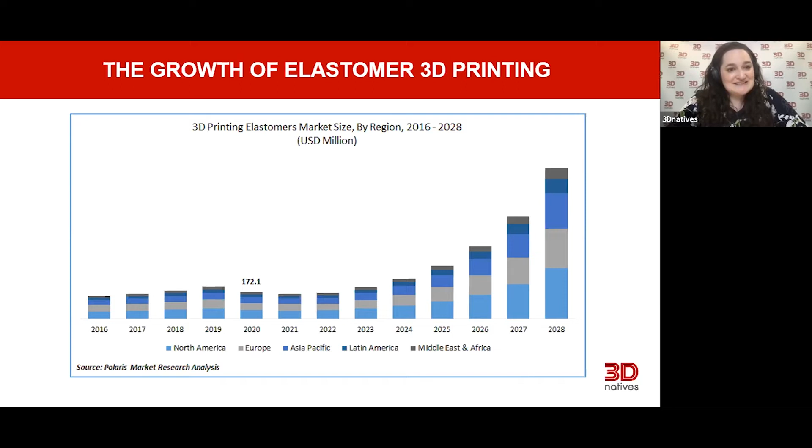So just quickly before I need to move on, the role of AM in maritime. Admittedly, maritime has been a little slower to adopt AM than some of the other sectors using the technology. However, that has been rapidly changing even over the past year.

Many in the industry are starting to see the benefits of using 3D printing for various applications, for example spare parts. One example, the US Navy is currently researching whether 3D printing could be used to create spare parts on the sea for their ships, meaning they could carry lighter loads and have more availability for spare parts in case of any emergencies.

AM is particularly interesting for the sector thanks to its flexibility, ability to create lighter, more optimized parts, and of course its cost effectiveness. For those reasons, we are seeing increasing R&D in the field.

Notably for today's webinar, companies like Lino and Hullworks are increasing the use of 3D printing in Greece, in the maritime sector, which is a major hub for maritime, as you can probably guess. And with that, I will leave you in the capable hands of our panelists.

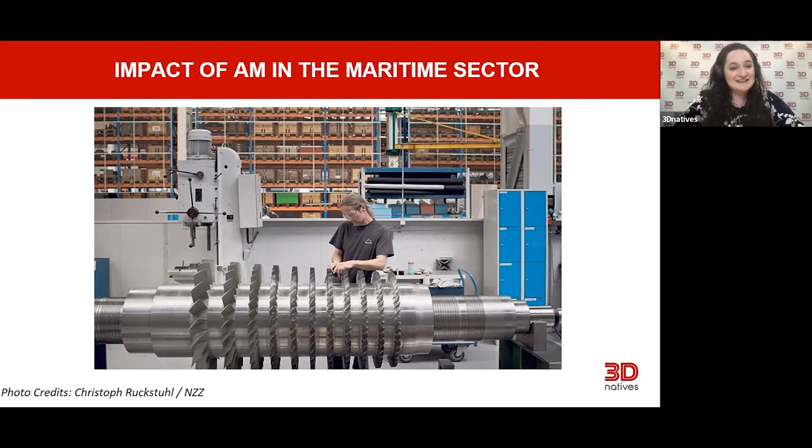An elastomer is a polymer with a property of elasticity, generally having a notably low Young's modulus and high yield strain compared with other materials.

Elastomers are best described as rubbery materials. Rubber originally meant natural rubber. Later on, elastomer became the word used to talk about synthetic rubber. Most rubbery materials are now considered a type of elastomeric material.

Allow me here to emphasize that the production of elastomer with traditional methods is a time-consuming and expensive process. So today we'll explore how 3D printing can offer a unique production solution.

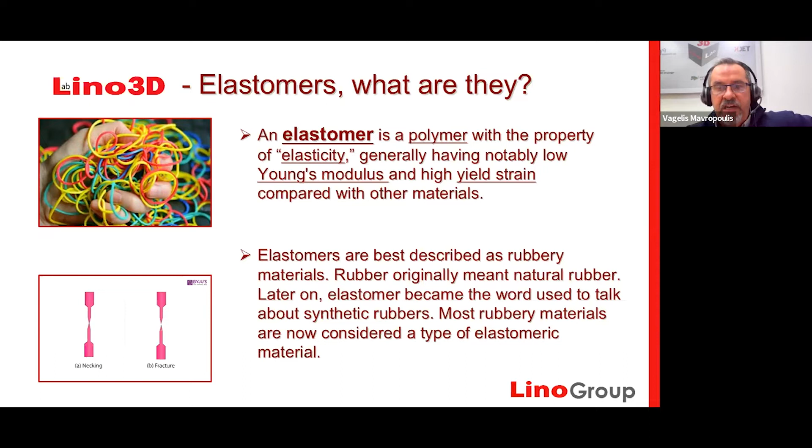So we have some elastomer examples. Let's focus on the types of elastomers: TPA, TPC, TPU, TPO, TPV, or TPS, and more.

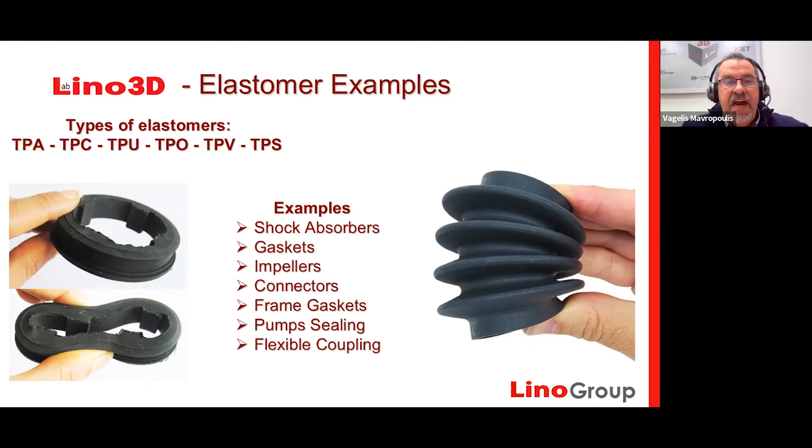Some examples familiar to all of us: shock absorbers, gaskets, impellers, connectors, frame gaskets, pump seals, flexible couplings, even the plastic carpets in our house use elastomer material.

Let's focus on the unique properties of elastomer. Which are the unique properties? First of all, elasticity or flexibility. Flexibility gives elastomers a high tensile strength and also elongation at break.

Plus, we have tear resistance or abrasion resistance. And of course, oil or in some cases, chemical resistance, depending on the chemical.

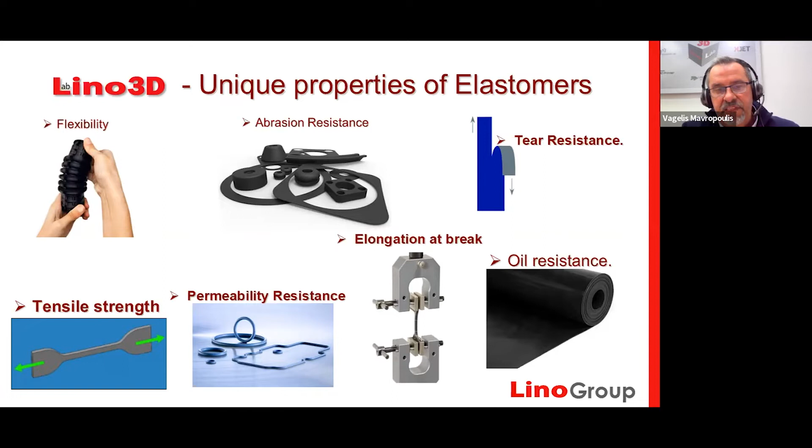So all the above unique properties of elastomeric materials come to be exploited with the use of 3D printing. What is that? First of all, it's volume production without tooling, replacing injection molding. This is the most important today.

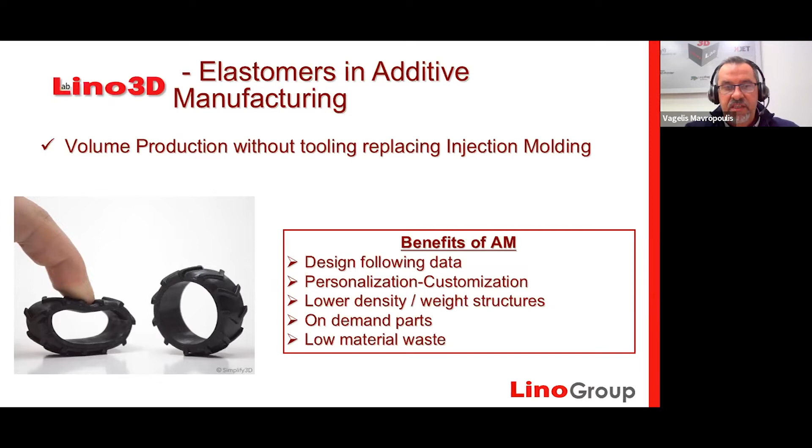Of course, probably all of us know that with 3D printing we have personalization and customization, lower density of the part because we can design it to have a lower density. The weight of the structure is also a matter of design, so we can design it in a way to be lighter, with on-demand parts. And the most important for service bureau services is the low material waste.

For those who are not so familiar with 3D printing technology, allow me to give a brief description. The oldest one is FDM, fused deposition modeling. The filament is passed through the hot nozzle and deposited in layers, creating the desired object.

The other technology, which is actually new, is called PAM, pellet additive manufacturing. In that case, the pellets or flakes are extruded through the hot nozzle again and deposited in layers, creating the desired object.

The other technology, which is also old right now, is SLA, or stereolithography. Here we have a laser beam that cures photopolymer resin point to point until creating the desired object.

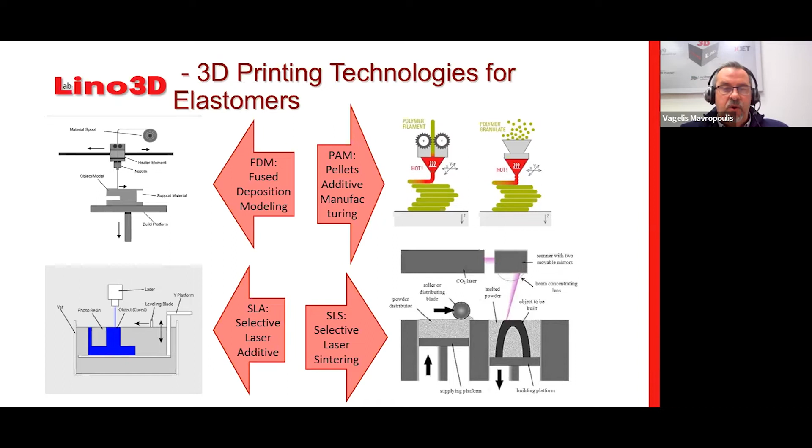So, 3D printing technologies for elastomer, and DLP. Allow me once again to focus on what DLP technology is. DLP technology is the digital micro mirror device, or DMD, which is the core of Texas Instruments' DLP projection technology.

The DLP chip contains several hundred thousand micro mirrors. The micro mirrors can be individually rotated into an on or off position. In the on mode, light from the LED projector is reflected by the lens, causing the photosensitive material to become solidified.

Regarding the bottom-up method, this printing technology has usually been adapted to small printers for prototyping or small production of functional parts, depending on the printer or the resin.

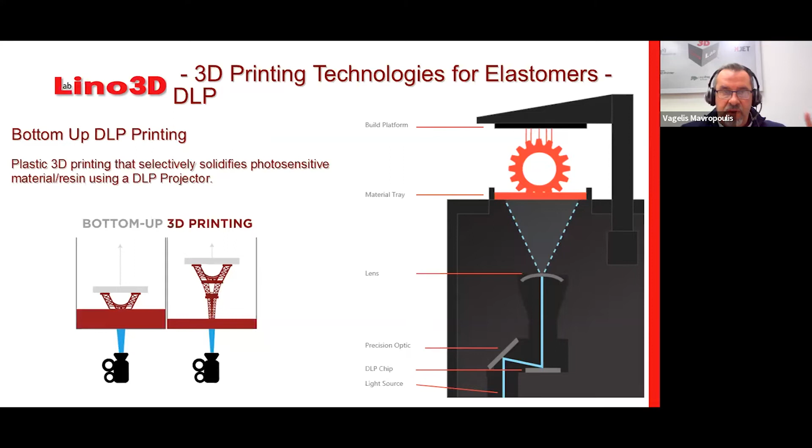Top-down printing usually refers to large capacity printers that use DLP technology to take advantage of its benefits. They still use a photosensitive material, and we can see in the next slides more deeply what top-down DLP printing offers.

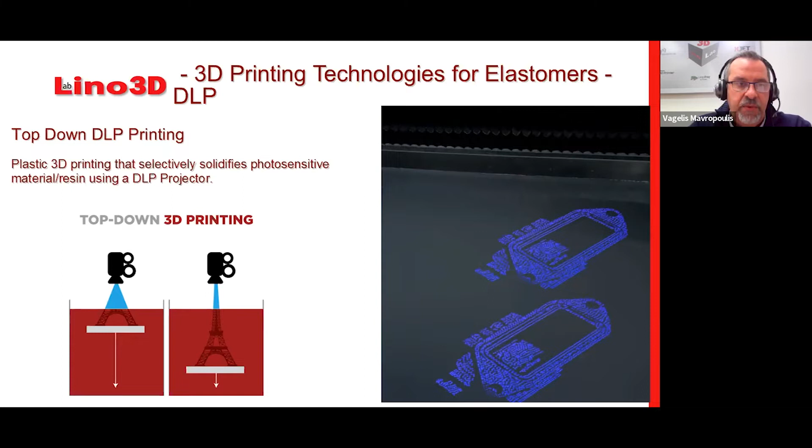Let's discuss a bit about ETEC, or EnvisionTEC. ETEC was the first company in the world to integrate DLP technology in 3D printing, over the last 15 years.

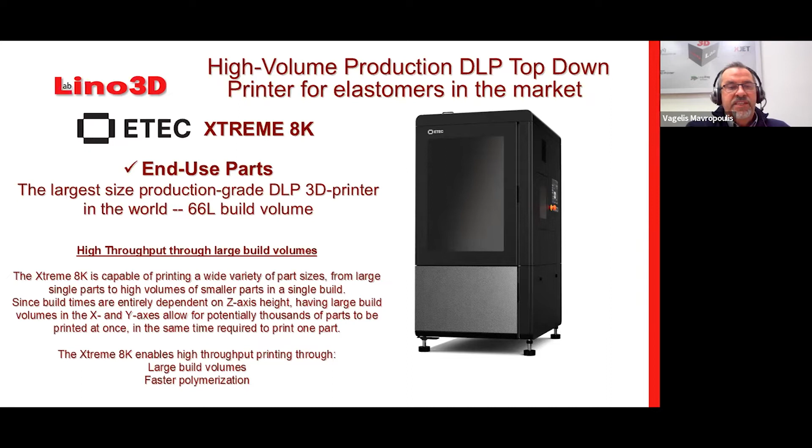Based on this experience and know-how, they built the world's first production 3D printer that can handle elastomeric material. The Xtreme 8K printer can produce end-use and functional parts of different sizes and shapes, taking advantage of the benefits that only 3D printing can offer. The goal of this machine is large scale production 3D printing with a volume of 66 liters of resin.

The purpose of the impeller is to cool the boat engine by transporting seawater through the engine. That means this part can operate in a very, very harsh environment.

Right now, if someone wants to produce all these parts, they should invest a lot of money to produce a mold, and wait months to produce the mold before starting to produce parts one by one. With 3D printing, we can print on demand, just one part.

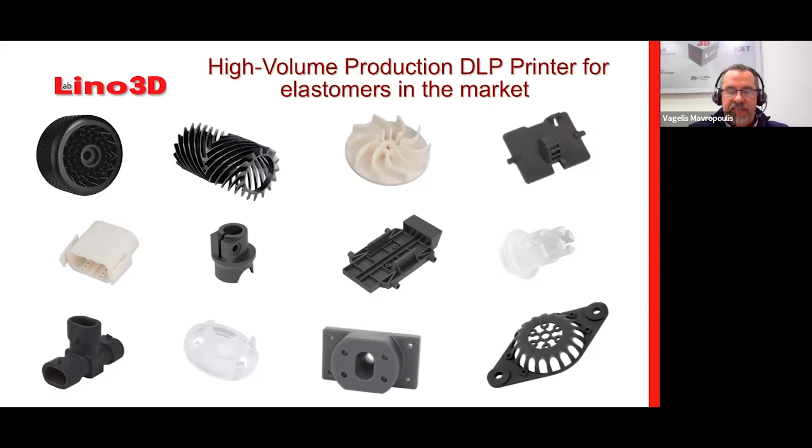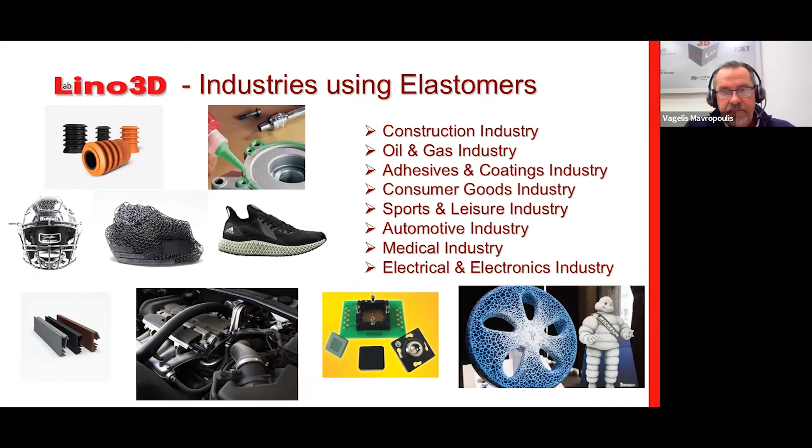So, elastomer industries—industries using elastomer are more or less everywhere: construction, oil and gas, coating, consumer goods, sports, automobile, medical, electrical. If we look around our house or office, we can see many elastic or elastomer materials. In this presentation, we will focus on the marine industry.

Let's discuss first a bit about our area in Greece. In Greece we have more than 5,000 islands, and the maritime market is a large industry, with many small and large shipyards.

Elastomer can take advantage of benefits like rapid manufacturing, customization, design freedom, materials enduring aging, abrasion and tear resistance, and on-demand production, adapting to the marine industry.

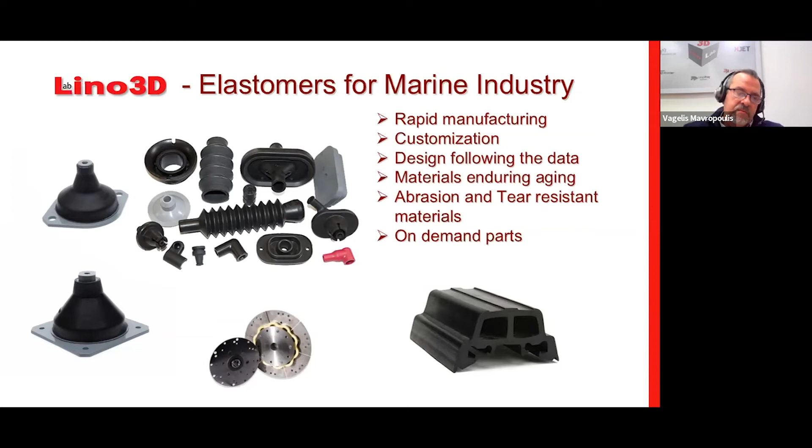That's why we decided to work with one of the best shipyards in construction of luxury inflatable boats, Hull Works. We asked them to suggest some of the parts made of elastic material that they believe would help their production. They chose to print not a luxury or fancy accessory that Hull Works usually puts on their boats, but parts that are constantly in a harsh environment and in contact with salt water. Some of these will be presented by Hull Works executive, my friend Lambros, in the next slide.

Hello and welcome from my side too. Thank you, Vangelis, for the nice presentation so far. Let me tell you very quickly that we build our boats out of GRP, glass reinforced polyester, if you haven't come across it. So GRP is the core material of the boat. However, once the hull and deck are built and glued together, we start installing other parts, whether that's the console or smaller parts like handles.

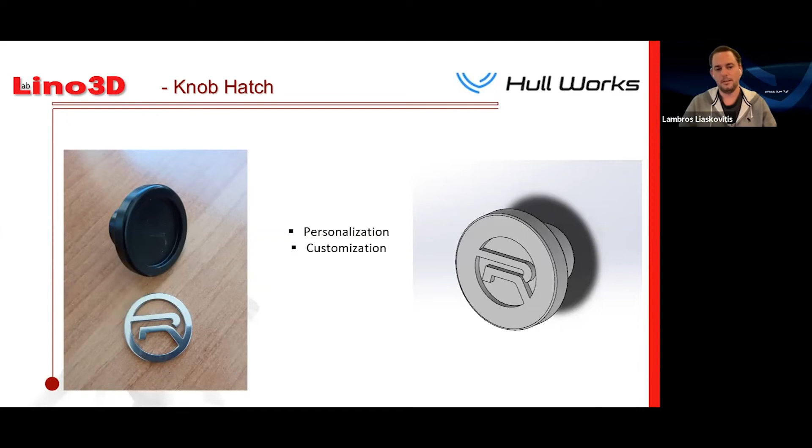Let's move on. If there are any questions, we can come back to that. So for the knob, we used a harder material with a Shore 90. Characteristics of what we can see also over here. Still, we use the same machine, Xtreme 8K.

If you want to swap material in this machine, it is easy, and we are able to choose a different material depending on the request of our customer.

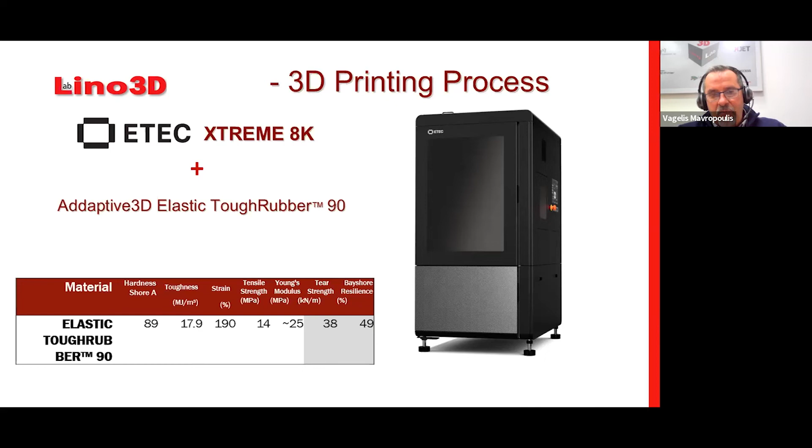Yep, next slide, Maria. So thank you very much. Yes, thank you. Well, please. No, please, it's you, Madeline. I was just going to say thank you to both of you for the panel.

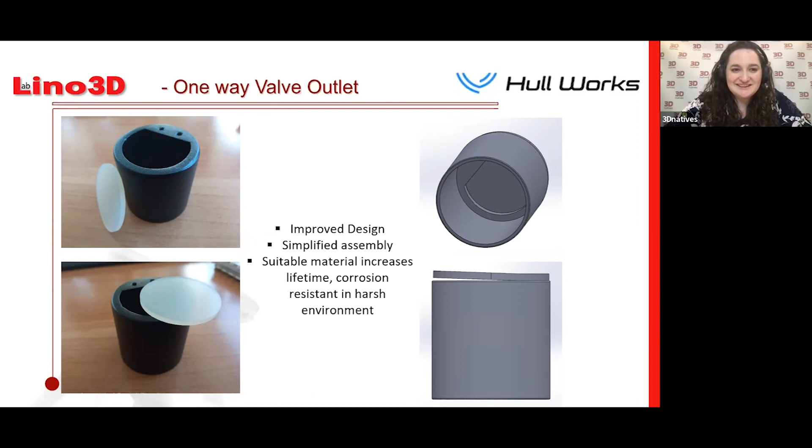Regarding the cost, did they mention the cost or not? They asked about the cost, though I'm not sure which part they were referring to. Me also - I'll say about cost, DLP I thought is much cheaper due to the production time compared to the SLS technology. DLP is 10 times faster than, at least, SLS technology. Okay, yeah, it's a significant benefit of using the technology, I'd say.

Okay, well, thank you. And then moving on, the next question, which just suddenly got more upvotes, is: how does the AM deck drain compare to the steel deck drain in regards to manufacturing cost, production time, and possible reduction of parts?

Again, production cost I would say should be roughly half. And production time, I think it's way faster. I don't have exact times to put, but it's so much faster. Vagelis, what do you think? And assembly also. Yeah, I mean, assembly is also faster. But they don't have exact times - I don't know if one thing takes one hour, then how long the printer takes to print it, I don't know. But yeah, it's definitely faster.

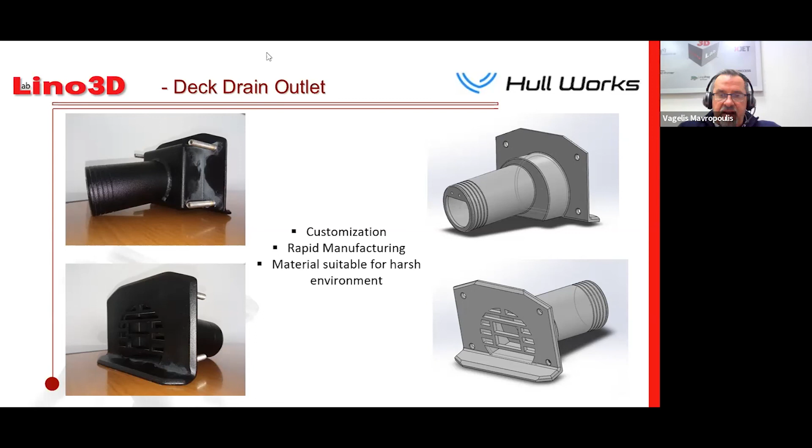If we focus on the mold industry - not only elastomer material, but 3D printing generally - the mold industry is the biggest and most expensive part of shipyards or the maritime industry. They invest a lot of money and wait months. With 3D printing, the months become days, and the price is more or less half. The goal is delivery time in days, not months - 2 days, 3 days, a week, not 2, 3, or 5 months. Just a week.

Is it additionally resistant to harsh environments, or are there other major requirements or regulations required for materials in maritime usage? So just to read it for anyone who hasn't seen it: in addition to resistance to harsh environments, are there other major requirements and regulations required for materials for maritime usage?

No, at the moment there are no specific regulations. Unfortunately, boat building in general is not so green. If I understand the question correctly, it has to do with - no, I'm sorry, let me reread it.